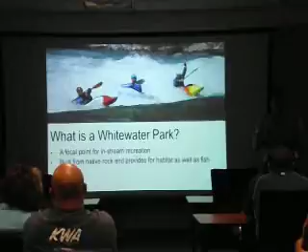Research has shown that something like 1 out of 7 to 1 out of 10 people actually get wet in a whitewater park. Most people who come to it come to watch, to picnic. In the case where we put this on a campus, it's a place to sit and study or hang out with friends, or get away from the bustle and stress going on around campus. At the same time, it's a place to hold competitions that people come to watch, and draw people, and brand your town as a destination for this type of recreation.

This is a park we did in New Zealand, by the way - it's part of a lawsuit, actually. They sued for lost whitewater, and we built a whitewater park with that money. So the reason we're typically there, barring a convenient lawsuit, is the economic impact that these parks bring.

It actually surprised me, because I spent 15 years living in the back of a car, kayaking all over the world. In terms of economic impact, I'm not the ideal case study, and neither were any of my friends, for the record. But at the end of the day, when you actually look at survey data, you find that some percentage, like 20% of people who go to whitewater parks to paddle, stay overnight and do it again. So you get this hotel business, you get this restaurant business, and when you start using survey data, which is the gold standard for this, it adds up to millions of dollars per year in economic impact.

This park in Golden, Colorado cost about $250,000 to build originally back in the 70s, and it gets about $2.2 million a year in economic impact. So it's a huge driver for the town. When you fly into Denver, you see the big sign, 'Welcome to Denver, home of the Golden Whitewater Park,' with a big picture there, and the Coors plant's right next to it. So it's something you see a lot, and it really has an impact.

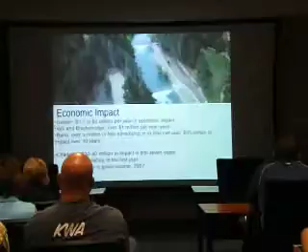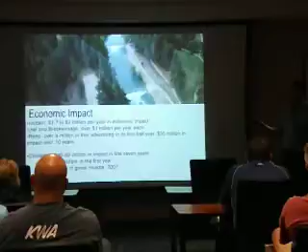Vail and Breckenridge—Vail's the kind of case study for it all, because it was estimated to have about $1 million in impact, but they hosted Teva, which is now the GoPro Mountain Games, and it's about $3.5 million a year in economic impact. It's a huge event. That park only runs about 6 weeks of the year. Essentially, as we're all skiing, the snow starts to melt, water runs for 6 more weeks, and then it's dry—there's no more coming. So that park has a very short season, but a very big impact.

And then the last part is really about branding, and I think for Kearney, that's a big deal. At the end of the day, in terms of creating tourism in your town, you're trying to get people to come off the highway, spend the night, learn about your community, be a part of your community, and leave tourist dollars behind.

In Reno, what they found was when they built this, it had about $1 million in free advertising in the first 6 months. To them, much like a whitewater park in Nebraska, it was mind-blowing. It's flat, it's a gambling town—it's not on brand—but at the same time, they created this park that everybody started talking about. CNN, Good Morning America, Christian Science Monitor, New York Times, all profiling what happened in that town.

And then, obviously, with the pump parks, there's a tremendous impact there—about $37 million a year, and about 350 jobs in Charlotte for the whitewater park that was built there, the pumped one. That's kind of a different beast than what we're looking at.

I mostly put this picture in because it's a beautiful shot, I think. But this is again the park in New Zealand that we did. We built these from natural, native materials mined from the area—natural rock, grouted together in the base of the river.

For the most part, what we hear from people is, 'I can't believe that was built.' The first couple of years, you can see the grout between the rocks and things, and you think, that's a whitewater park. But years into the future, it fills in with cobble, moss, and algae. And what you're really seeing, because we design it to use the river's natural morphology, is something that looks more and more like the river.

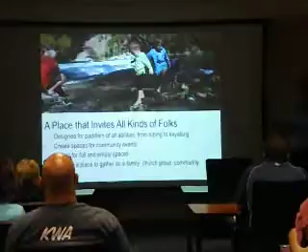And the last thing we try to do, and you'll see this a little bit, is create a design that's not just a river design, but also a park design. Right now we're in the preliminary stages of that, so we'll bring a landscape architect in as we move forward. The idea is to create something that invites all kinds of people.

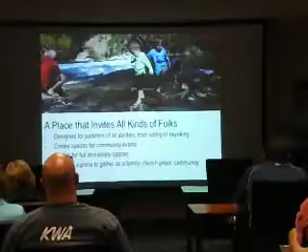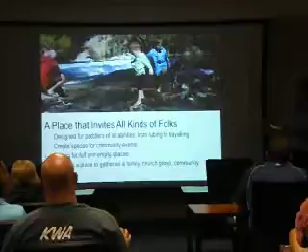It's a place where kids can play in the sand, make sand castles and hang out in the eddies, where you can learn to kayak, float through on a tube, float through on a raft, or have a river festival for people who don't paddle. Part of it is that people are amazed there's a whitewater park, and part of it is that we design it to be fun for all these different groups, adding natural play features, festival areas, and things like that.

I put this in to brag, because I modeled that the 100-year flood would be there, and then we ran the 100-year flood, and it came right into the spot where we modeled it. This goes to my earlier point that we designed these to not flood your homes. In this park, we had the ability to run it at the 100-year flood, which I did for fun to make it look epic. So we ran, I think, 10,000 CFS through this park.

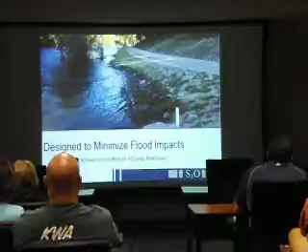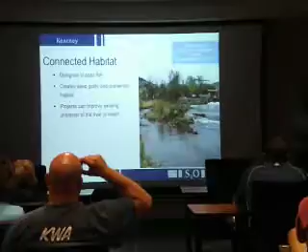You can see where the rock armoring is here that we put in. It came in within a foot of that, and it had a foot of safety margin on that. So again, it's a very accurate thing. When we talk about building a park in your town, we take this task very seriously.

And again, this goes to our earlier discussion about habitat. I thought I'd walk you through a park that we did. This was a park I was brought down to in San Marcos, Texas, by a friend who runs a kayak program down there. This is actually the guy I was telling you about. And they broke their dam — actually, the kayakers thought they had broken it.

They were all afraid because they apparently strapped something on there to make a wave before we did the park. They strapped it on there one day, and the dam broke. So they were like, oh hush hush, come down and help us fix this. So we talked to the town manager, and they said don't tell them we did it. But of course the dam had eroded over a number of years.

We came in and basically said, look, we can fix this. The Lions Club down there does tubing, and that's their main fundraiser, so they run thousands of tubes down this river near Austin, Texas. They wanted us to fix it the way it was, but we wanted to do a whitewater park. So we came in and radically changed it.

You look at the overbank there, we opened the river up so that you could come down to the river and see it from anywhere in the park. Before, if you were up here at a picnic shelter, you didn't know the river was there unless you came down that stairway. They had concrete bags all along this side to separate the river from the parking area.

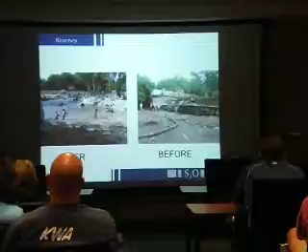So we brought in natural marble. We dried it out — there were some endangered species there, so we transplanted those. Then we reconstructed the dam, and went over it with natural marble to create a natural finish to it. This is what I always tell the town council at the grand opening.

They were a little bit against it, a little bit for it, and then at the grand opening they all jumped in the river — they were so excited. So I challenge all the town councils to do that. I didn't say that to the mayor today, though.

So we built 3 drops out of 1. That's the top drop where that dam was. It's great fun — it's 72-degree water, crystal clear, not this day, but soon thereafter.

I'm on the 3rd drop now, and there's 2 drops there. It was incredibly successful, and this is a great park to look at because it's very similar to what we're looking at doing in this community, in terms of flow rate, size of the river, and finish of the river that we would use.

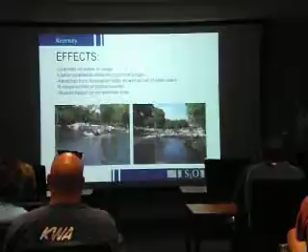They had so much success they actually brought lights in so they can use it at night. They didn't have enough capacity in the first few years, and they had to hire some new rangers to help police the area. But we talked a little about how that other park is being used.

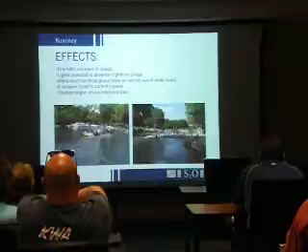This whole park is 3 drops — I'm standing at the downstream end, and the upstream end's right up there. People continually loop this on tubes all day long while you're there paddling. The U.S. team does training camps there in the winter because it's warmer, and they held the Olympic qualifiers there a couple of years, so it has a real significant presence in that southwestern part of the country.

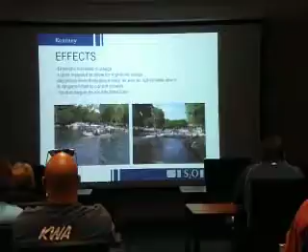Has an impact. So anyway, jumping to this part, we actually looked at a huge amount of Turkey Creek and this Kearney Canal, but focused in on 3 sites: one is up at the university in the Kearney Canal right near the outfall from the hydro structure. We also looked at Yanney Park in terms of maybe a pump option — more to put that on the table than to seriously study it, but make you aware it's there as a possibility if the other ones don't work out. And then this Turkey Creek down here is Second Avenue, in terms of using the combined flow of those two.

When you look at the flows in the canal, this is your range for San Marcos, and you're just a little bit above that. When you look at very efficient concrete courses, they're actually up in the 400 to 500 range. Some of these Colorado parks are more like 2,000 to 5,000 CFS, so a lot more water, and that's where you see the big surf waves.

So we looked at a stretch - from behind this bridge, there's a depositional area below where the outfall is from this hydro, and from that reach downstream to below where I'm standing on the bridge was the first area we identified.

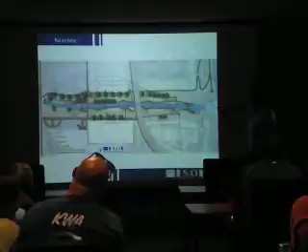So here's that outfall structure in the background. Where it actually starts varies, but right now there's an existing road grade coming down here. We also envision trails along the river level, so when you're down in the river, you don't have to climb up and out every time you want to go back to the start.

We create this lower area, and from a park standpoint that seemed very important to us, because we've all been students - it's stressful, you live in this concrete environment of libraries, dorms, and classes back and forth - so we wanted to create a place on campus where you were down and away from all that, out of the wind, more in a natural state.

We wanted to create something about 1,000 feet long, finishing well before this underpass, which some people identified as a safety risk. I don't think at the end of this project that will be an issue, but the idea was to create something self-contained so people can loop it right here and park in it.

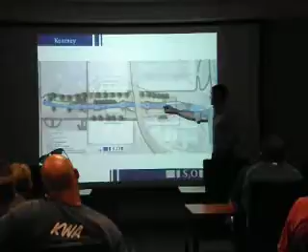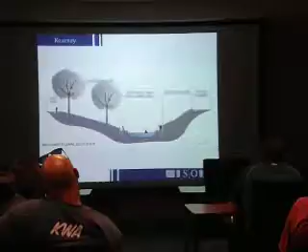There's 4 major drops, plus a significant number of features, whether midstream boulders or eddies created along the sides as you go down. This trail section is actually quite narrow because of the constraints there. There's a channel in the middle about the same width as it is now, but with the current narrowed and made deeper, plus a river-level trail going up and down, as well as trails on top. We also contemplated ADA access down to the river.

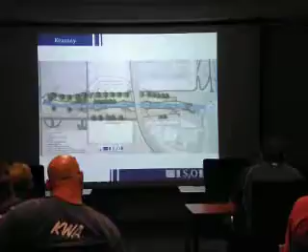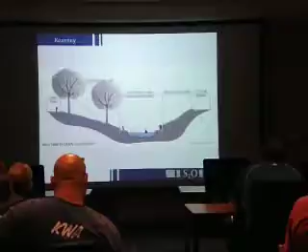Yanney Park was the other one we looked at, and the idea was to create a pump park using, a pump park is like a fountain, right? You need a sump that the water goes to at the end of the day, and you pump it up and it goes in a circle.

So we did one in Oklahoma City. It was about a $55 million whitewater park. It's a big one. Some people from this town have actually been down there paddling on it. It was a bigger thing than what we're looking at for this one.

This one we're looking at is more Kearney sized, in terms of it's about 100 meters long. There's actually 3 channels in Oklahoma City, and this is about a third the size of one of those channels.

It serves a couple of purposes, and we have a couple of videos we can share with you on this. The idea is you can turn it on and do all kinds of kayaking. It's very efficient because it's concrete. The obstacles are movable, so you can reconfigure it in different configurations, and it creates a great place to kayak, to surf, to do a number of things.

It only drops about 6 feet, so operationally it's affordable to pump compared to an Oklahoma City or someplace like that. A very adaptable product. You could have races, you could have freestyle, you could have just recreational paddling or tubing, or what have you.

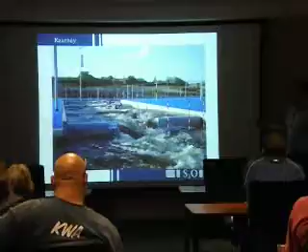Its biggest purpose, and the reason we originally designed it, was to be a swiftwater rescue training course. First responders don't really have any place in the United States that they can train for swiftwater rescue. And in the places they can train, they often can't train in very realistic scenarios. They're in a river, and it's about as dangerous to train as it is to do a real swiftwater rescue.

You can't put a car in a real river, and rivers aren't very reliable anyway. So we've created something where this car has been prepared to do exactly what it does. It's rolled in, it's strapped down, it's bolted down, and then you do the training.

We also do slow flooding scenarios, rope work, self-rescues. We can go through all these scenarios that are very realistic, and we can do it during the daytime and at night, because if they get into trouble or start to drown, we can shut it off, and 2 minutes later it's finished. So this was an option for Yanney Park that we looked at in a very cursory way.

That's what it looks like. You can see the pump station over there, and then it just goes back into a pond on this side. This one actually has what we call a flood simulator in the middle, which is not something we originally thought about.

It's just something to keep in mind as you move forward, but it's not something that anybody's really expressed an interest in. It's about a $4 to $6 million bill once we actually get into that.

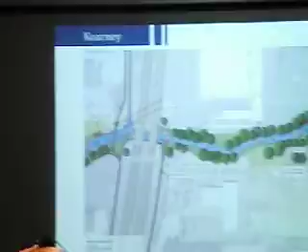The Turkey Creek site, you can see 2nd Avenue here. It begins just upstream of 2nd Avenue and goes down to here, which is where the new takeout for the river trail was just created. You can see that's the takeout that was created.

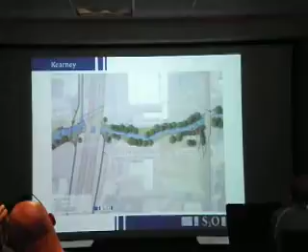One drop structure just above—and I've talked to you earlier, we moved it above that takeout area. So just above that takeout area, and then the upstream one would be just above the pedestrian bridge on the upstream side of 2nd Avenue.

There's not a lot of drop in this area, and that's why these are so spread out. You need to put them closer together, you need more slope. We would also create—there is some momentum there that we can use—some character in terms of eddies and rocks and boulders.

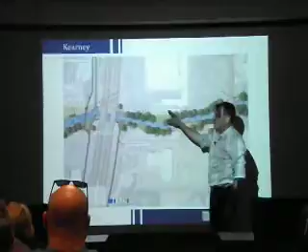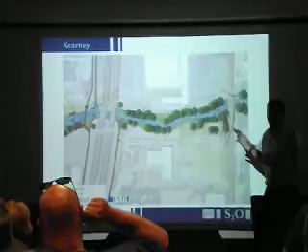On top of that, and this is where the budget gets a little changeable: one idea is to do the minimum you can to have your whitewater park, and the other idea is to actually create a river park down here. At a minimum, it's kind of a $500,000 project to get in there and make the changes.

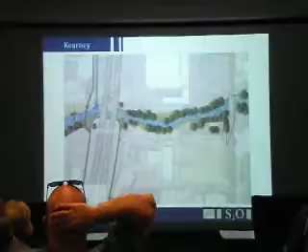If we did go to town hall and say, look, we want to create something with trails on both sides and a walking loop and pedestrian bridges, then that becomes a bigger project.

But something that would fit in very well and is also very feasible. You want to do river work first, but as things go forward, you can create a very neat riparian kind of park down by the river on a reliable basis as well.

So it's not, like I said, a Hawaii Five-O. You're not stand-up surfing with the wave over your shoulders or anything. But at the same time...

So this one is at a minimum about the $430,000 level, so it's a cheaper price. It's about half the length and about half the cost of the park that we looked at at the university.

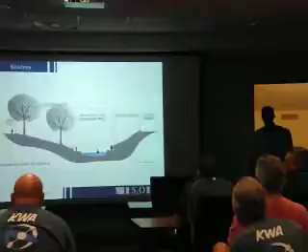How was the reception today? I'll let you talk politics.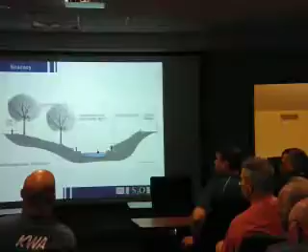It was an extremely constructive meeting, and we walked away with a pretty clear direction on what the remaining questions are. The meeting went back and forth, but it ended extremely positively. There's some concerns about liability still that we need to answer, and we intend to do that. So I wouldn't walk out of here assuming any of this is going to start happening tomorrow, but we're going to continue on, and that was by agreement with all parties in the room.

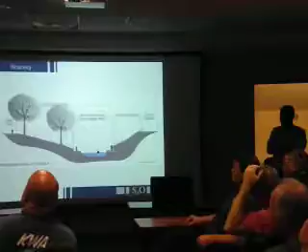NPPD owns that land, and they get to decide what the rules are and what the concerns are. We certainly would want the same right if we owned the land too. So we're going to answer and satisfy any concerns they have, and that's their right, and we respect that completely.

In regard to that, do you have any statistical data on liability for other parks like this that you've seen? Would you have any statistical data on accident history or anything like that on other parks of this scale?

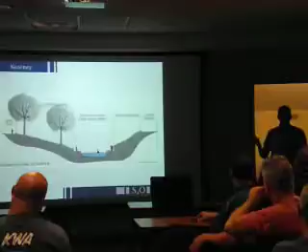I don't have any statistical data, but it's not an injury-prone thing. The phone's not ringing up about people being hurt, and there's never really been a lawsuit in my knowledge. We do see bumps and bruises, people look down for a run through and hit their shins or things like that. But as a rule, we're able to design out the drowning hazard, and people can drown in a lot of scenarios, but we design that out.

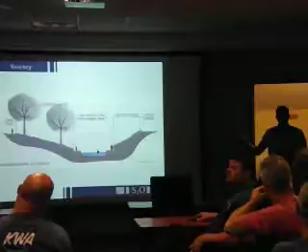That is what I wanted to hear, design out the drowning hazard. So we take out, for example, foot entrapment ability, and we take out the ability for trees to get stuck, and if they do, it's maintained so they're gone. There's not pinning hazards, there's not things like that. So it's something we can go and engineer to some degree.

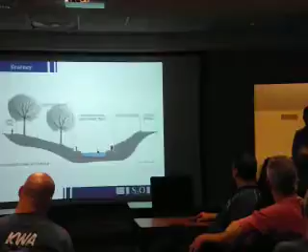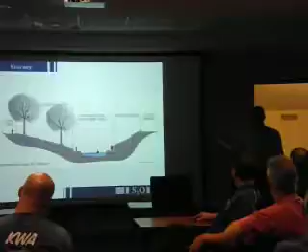So next steps are obviously political, right? We need to reach consensus on which site. You all need to reach consensus, and the city needs to reach consensus on which site is most favorable, and get those permissions in place. Fundraising is also the next step, to raise that money to go build that. We have seen parks both ways, where they raise the entire funding or just the design funding, and then we design while they raise the construction funding.

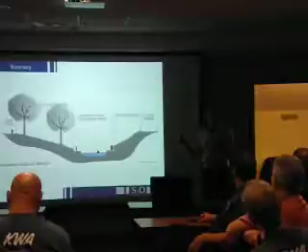Once we're told to go design the rest, there's another phase where we'll be back and forth, going in front of the same group, saying here's the design we have, preliminarily, until we get buy-in on the design. The engineering goes on in parallel, about a 6 to 9 month engineering and design phase, including permits. Then we're able to go to construction, which for this upper one is typically about a 4.5 to 6 month construction window, depending on how it's done.

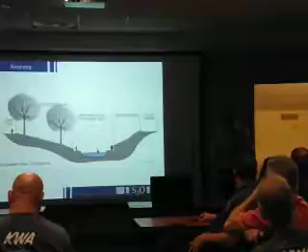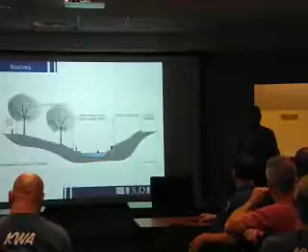For the lower one, it'd be quicker, more like 3 months. To add to that, does it matter if water's flowing there? Obviously there's no water coming out from the park to the base of that. So do you work during that time frame, or do you start to get close to the winter and fall?

The answer is yes and no. If we can get out of working with water in the river, we do. And if the river's running, we do water control, which is expensive, but it's very feasible. So do you work through the winter months?

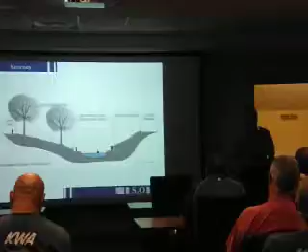Other questions? Yeah, wouldn't your long-term O&M be quite a bit cheaper on the first option than the county park option? Yes. That first option has a lot of benefits there. When you walk around and say, gosh, what's going on in Kearney, that top one is a great option. That's a great option no matter what town you're in.

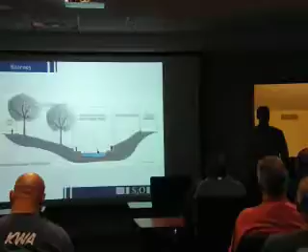Would you say the first option has the greatest potential for economic returns for our community? I would say so, yeah, that's great.

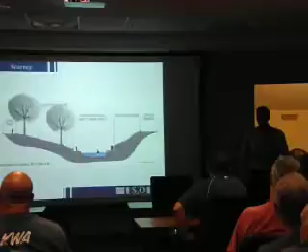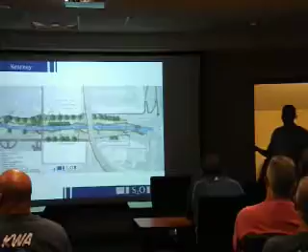When you visualize where you want to build a whitewater park, this falls in my top grouping for sure. There's a lot going on there, and what it brings to that university - I don't want to speak for the university, but what it brings in terms of bringing students into this community, which has a huge economic impact in comparison to a tourist, but also in terms of keeping that brain trust in this town, which is a big deal too. It's a play-where-you-live thing for the latest generation. There's a lot happening there.

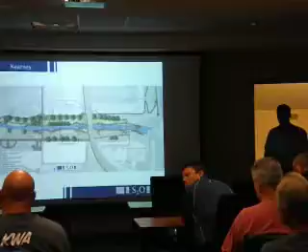Do you ever see baby steps? I mean, you're taking that already obviously, but the Second Avenue piece, which would be a little more economical, maybe not quite as exciting - does that help sell it for a bigger project like the first one?

We do see a lot of projects happen in phases. Typically people settle on a site as opposed to two sites, and that doesn't mean that's what you guys need to do, but typically they do. So the phases become: let's do this section, or let's do the river work first and do the park part later, or we look at it in a bunch of different ways. A lot of times it's funding in different segments or through different funding bodies, so the river's done through one, the rest through another, things like that.

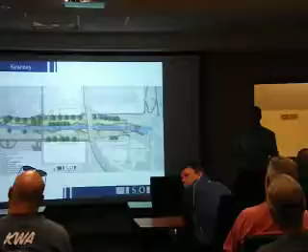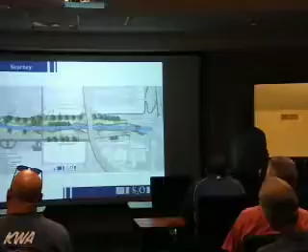So this could be split in half, or we could accomplish some of it if we overcame the political hurdles? Yes, there's ways to phase this, and we have to strategically think about the best way. I don't know if it would be in half, or river work first and then park work, or things like that, but there's ways to split that up.

So I think what we would need to do as well at some point in time is take it forward to the next step of engineering and really start to understand these walls and what those costs are. Then there's some things to get into. It's not hard to solve that engineering problem, but it can be costly.

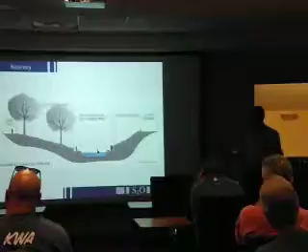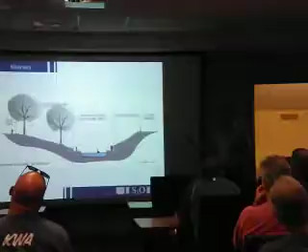Apparently there's car bodies there, potentially like elsewhere, so that seems to have been a popular thing at some point in the past - Detroit riprap, it's called. Anyway, usually a geotech would assume worst case scenario for the soils, and so walls may be thicker or higher, things like that.

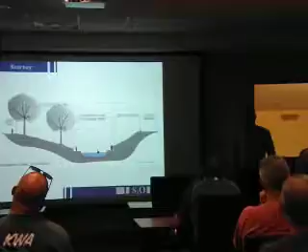Back to that previous slide - is that just going to be a simple beginner run? Family friendly? This would be very family friendly, yeah. I think everybody in the room would climb into a tube and tube down that.

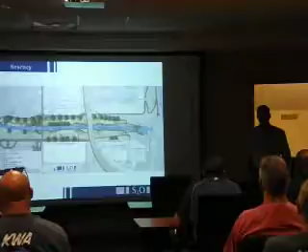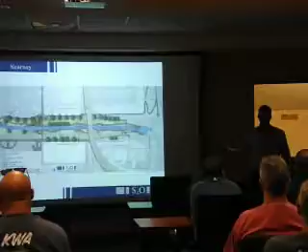Here now, which I love by the way, but it didn't have that sort of pushy, defined eddies and things like that are there. This is a great club - club level whitewater, basically.

It gets more efficient when you start to see - this is the same thing, right? It's about the same slope and about the same drop, but you get a lot more power with the concrete. So that's another thing to think about in terms of scenarios. But aesthetically, this is more natural and more pleasing.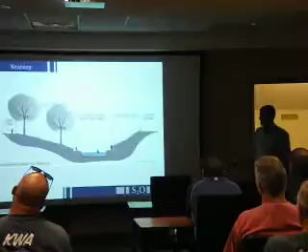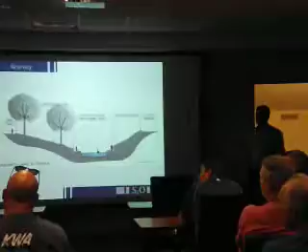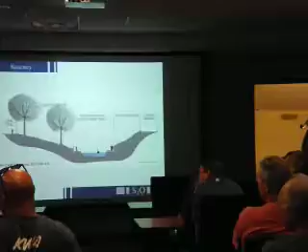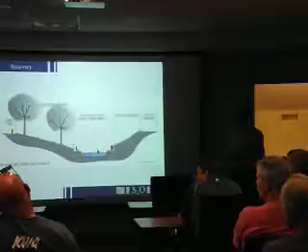Initially, when Scott first came back with some preliminary stuff, I think he was leaning more toward the concrete channel and the rapid blocks, because it's more efficient. You can produce more power, and in terms of pure whitewater performance, there's no question it's a better option. But we as a board came back and asked him to go with the natural because we feel it lends more to the community in terms of aesthetics. It provides that snapshot that people remember when they visit this town. There's no question the rapid block feature would be on the cover of every Kearney and UNK catalog, but I don't think it would provide that same sense. So we can debate whether that was the right decision, but that's the decision we asked Mr. Shipley to make, because each option costs money to look at. So with our limited resources, we chose to have him focus on the more natural look.

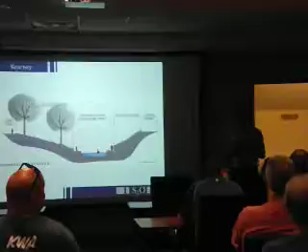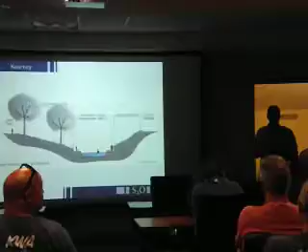In terms of sourcing rock, we're not exactly known for lots of rock around here. We haven't looked at that yet in the next phase, but it's typically quarry rock. If you're shipping it a long distance, it's pricier, so that may impact the price. But it's big rock—these are 3-foot diameter boulders placed along the river. The armoring can be different sizes depending on velocities, but the walls are typically that big rock. So we would need to look at that in the cost.

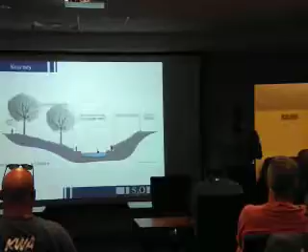In other projects that you engineered, have you been required or have you incorporated anything that could be considered an environmental amenity, such as filter strips, wetlands, or sumps—something that would allow passive filtration of runoff water? In other words, keeping soil out of the stream, which is a good thing to do anyway. Have you done this in other places?

We have. In fact, we also do river restoration, so we specialize in engineered wetlands, and we're building a tremendous amount of habitat right now in a lot of the parks we're doing. It becomes much harder to do in this scenario.

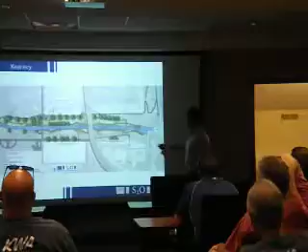After completion of that project, would the stream be wider? It would be. And how far west would the trail go? In our design, this is the outfall, so we're roughly where the road comes down, I'm assuming that's where we'll start. I may move downstream because we can't back water upstream. And then the finish would be just above 24th Street.

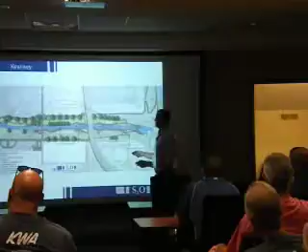There's been talk about creating connectivity for the river trail downstream, and also connectivity with the bike trail that's there. That would probably be phase 2, but this one is contemplated in this immediate area. It's about 1,000 feet long, which is about an average length for whitewater parks.

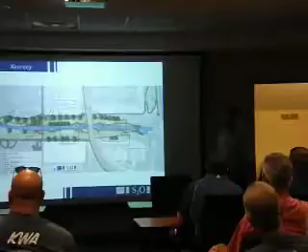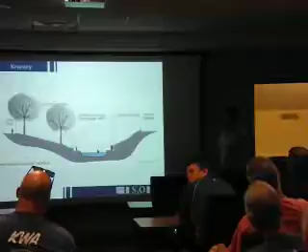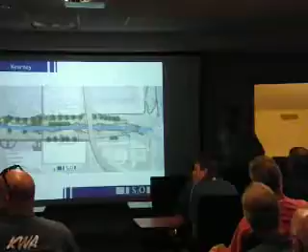So the actual width of the stream, is it going to be about the same as it is now? It will be, yeah. And it'll be deeper. When you look at the drop structures themselves, it gets narrower where we constrict it and send it over something. But the boats will go straight through that part, and then there'll be wide edges that peel out into eddies and things like that. Your current profile should be about that wide.

That's a very similar amount of flow, so something along those lines. And a little wider at the top, because we won't be as deep at the top as we move away from the hydro plant. So just a little variety as well.